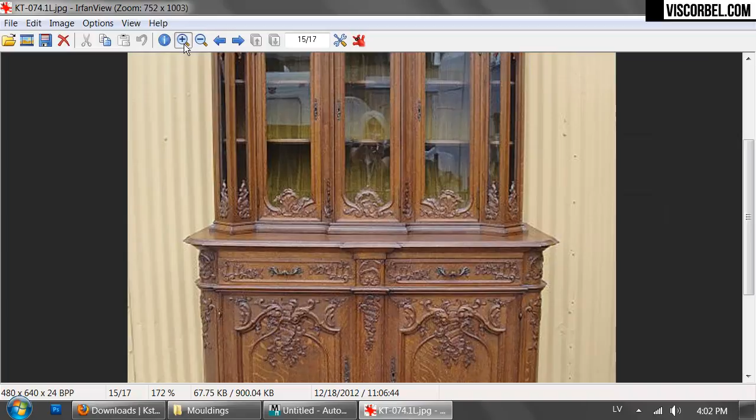So sometimes the molding profiles have some detail carvings on them, like this egg and dart profile here. But before we get to these ornament carvings, we have to figure out how to make the moldings themselves. Okay, some tabletops, baseboards, etc. So the basic idea is very simple, and the molding is made by extruding a profile along a path.

3ds Max offers multiple tools to do this, and my two preferred tools are the Bevel Profile Modifier. It's quite easy to use and it has a very direct approach. You can control everything about your profile directly by manipulating the profile subobject. And you have the Sweep Modifier, which is a bit more customizable, but the workflow is slightly different. So first I'm going to show you the Bevel Profile Modifier and how I work with it.

So let's say we have this path and we want to create a profile that we want to extrude along it. Let's say it goes like this. So let's say it's some sort of a tabletop or something like that, with a very elaborate profile. Okay, so you pick your path and add the Bevel Profile Modifier. Now just click the Pick Profile button and click on your profile.

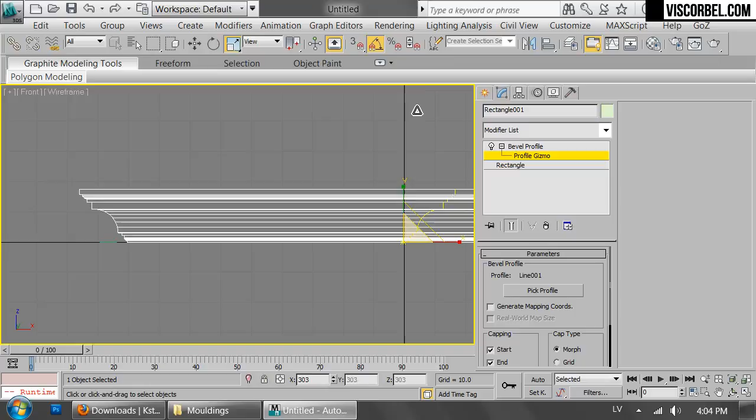Okay, so looks like our profile is pointing the wrong way, and with Bevel Profile it's a very easy fix. You press 1 to activate the profile gizmo, and you can manipulate it directly. So for example, I want to rotate it to 180 degrees. If I want, I can scale it up, scale it down, and basically do whatever I want. I can offset the profile as well by moving it inwards or outwards. So it's a very easy and a very direct way to interact with your final object.

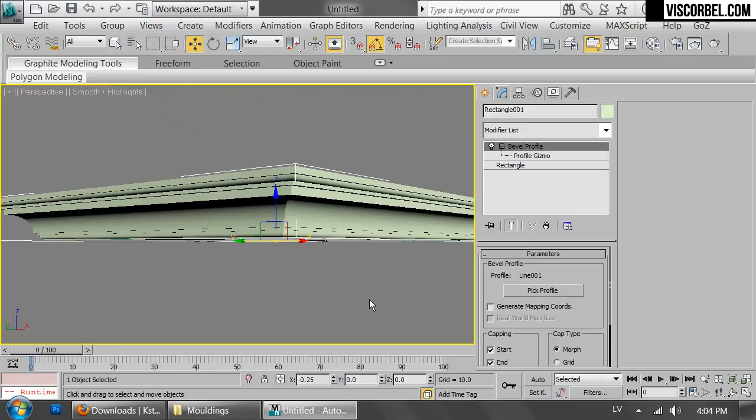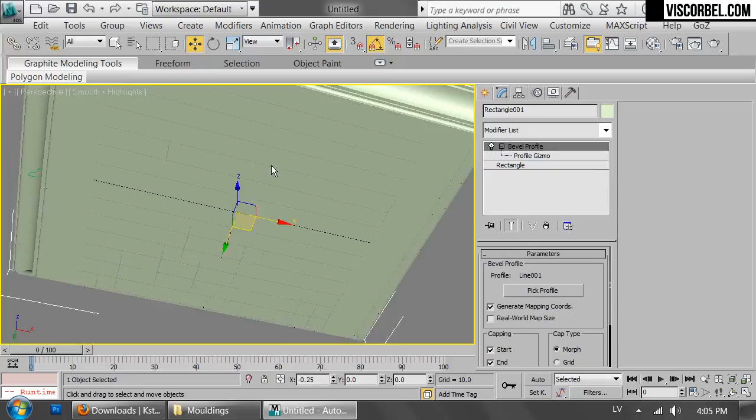And basically that's it for Bevel Profile. You have these options for capping here, which allow you to cap the gaps, and they are sometimes quite useful. Okay, and you probably want to generate the mapping coordinates as well when using this modifier. This way you can just assign some materials and render it.

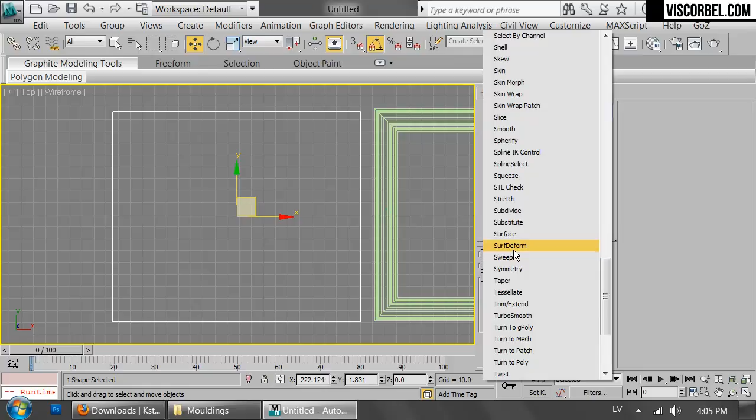Okay, so the next modifier I want to show you is the Sweep Modifier. It works in a very similar way. You go to Modifiers, select Sweep, and change from the built-in section to custom section. Click Pick and pick the profile. Okay, and as you can see, there is no profile gizmo for this modifier. You have to do all the adjustments with these settings here.

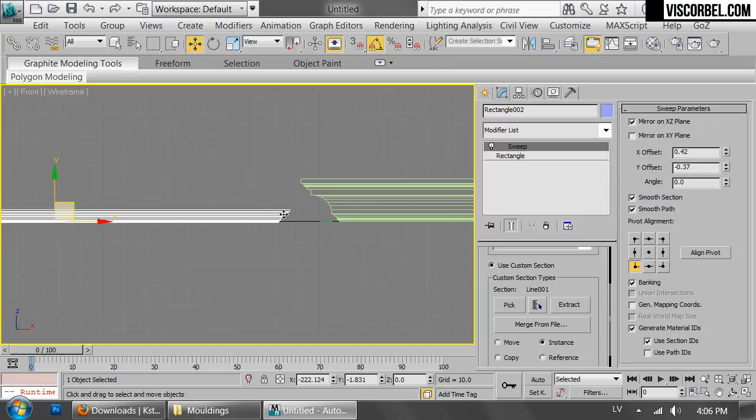You can mirror the profile on two planes. You can offset it as well. And you can rotate it here. So basically you can do almost everything you could do with the Bevel Profile Modifier except for scaling. And you also have some additional options, like you can select the pivot alignment or the point on which the profile starts. So this can be sometimes useful.

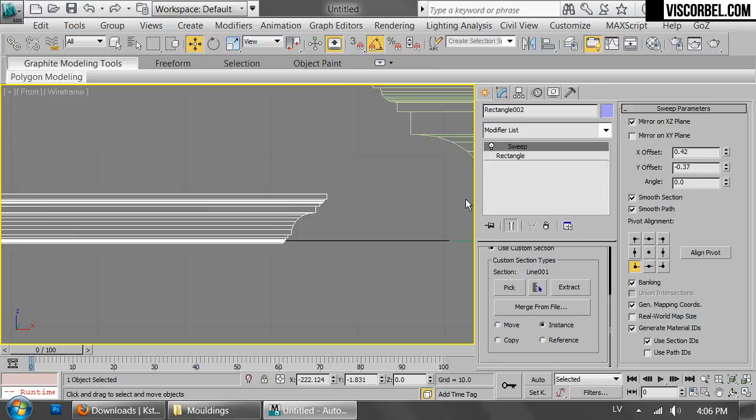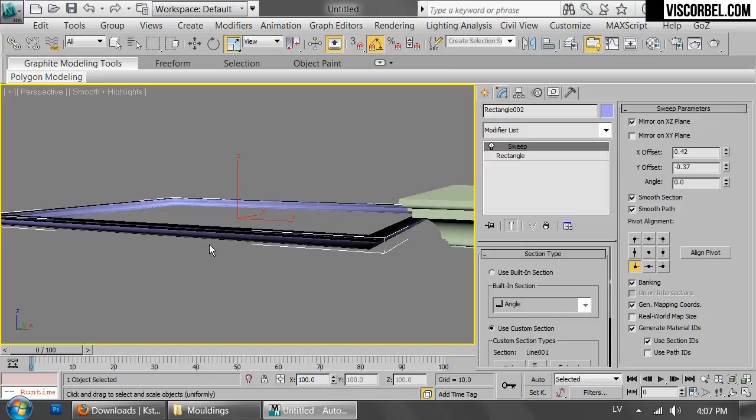Okay, and to scale the profile, the only way you can do that is by selecting the original line and scaling it up. Not the line itself, but the spline subobject of it. So you can't really scale it directly by modifying the modifier. So sometimes that's a bad thing. Okay. And if you get the profile that's inverted, like this one here, you can add a Normal modifier. And to close the gaps, you have to add another modifier, the Cap Holes modifier.

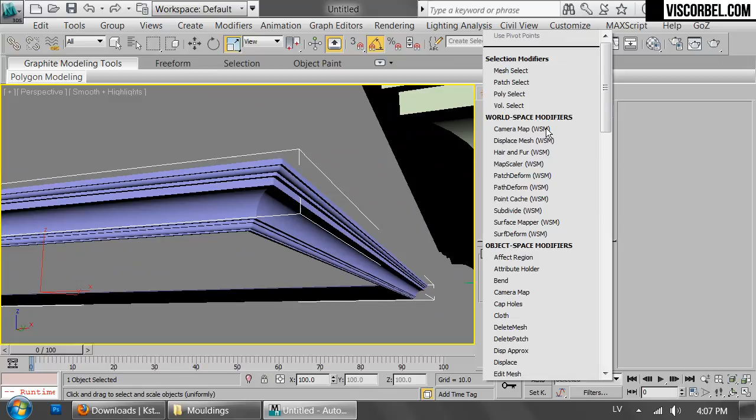So sometimes it's a bit more work, but sometimes the pivot alignment and other settings are easier to use than messing with this profile gizmo for the Bevel Profile Modifier. So the choice is up to you, really, whichever you find more comfortable.

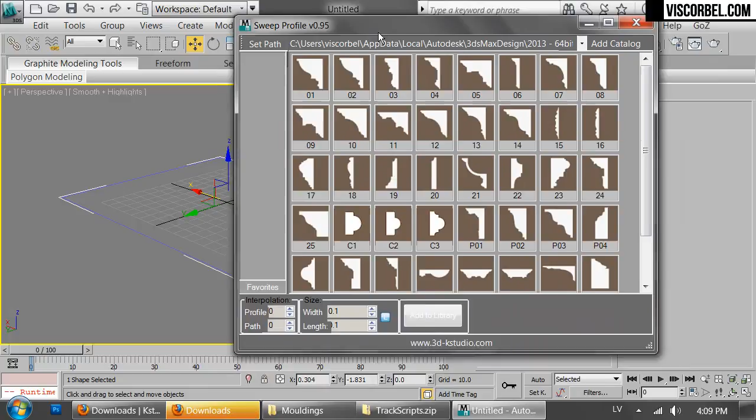So the way it works is you select your path, press the shortcut, and it brings up this window for the Sweep Profile script. And it's very simple to use. You just pick the profile that you're interested in. For example, let's try something like this one. And it automatically generates the geometry by using the Sweep modifier.

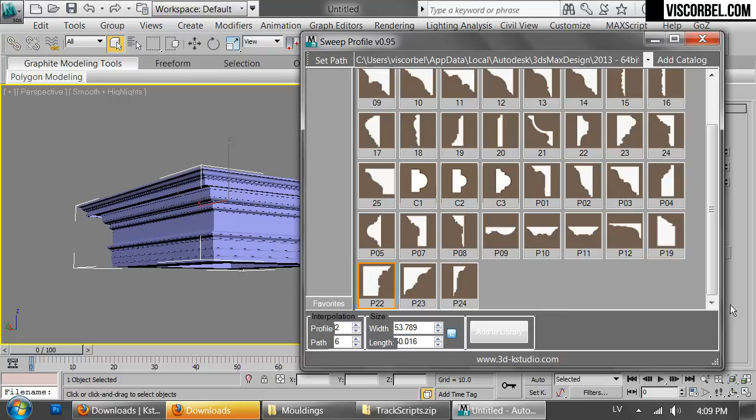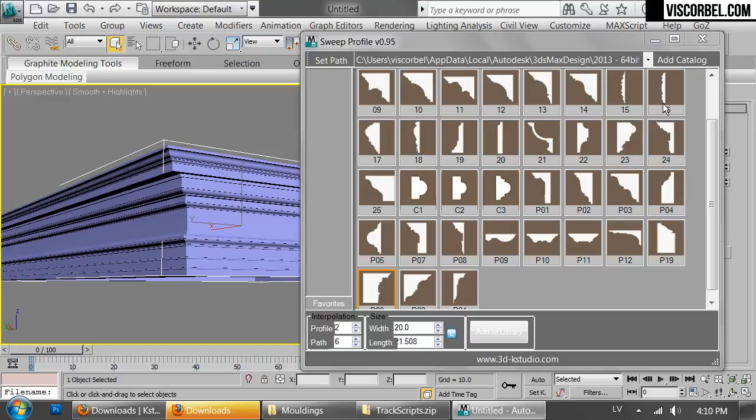Right, and you can actually scale it directly from this Sweep Profile script interface. You can enter precise values as well. You can control the interpolation of the profile and the path. So it's a quite useful thing to have. And you're not really limited to these default profiles. You can actually create your own. For example, I'm gonna make something like, let's say, something like this. Just some random profile.

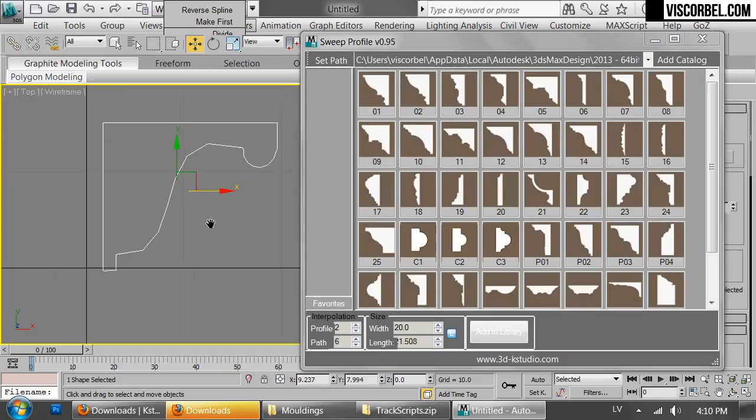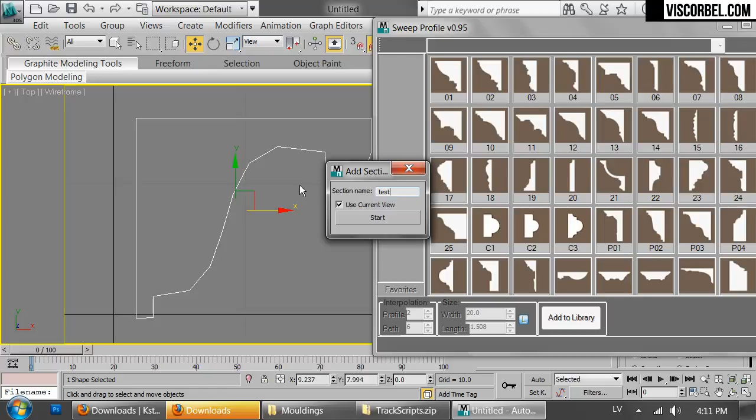Okay, and once you have this profile ready, you can frame it in your viewport. This will be used to generate the screenshot. And press the Add to Library button. Okay, enter some name for this profile and press the Start button. As you can see, it was added to the list of profiles, and you can use it whenever you wish.

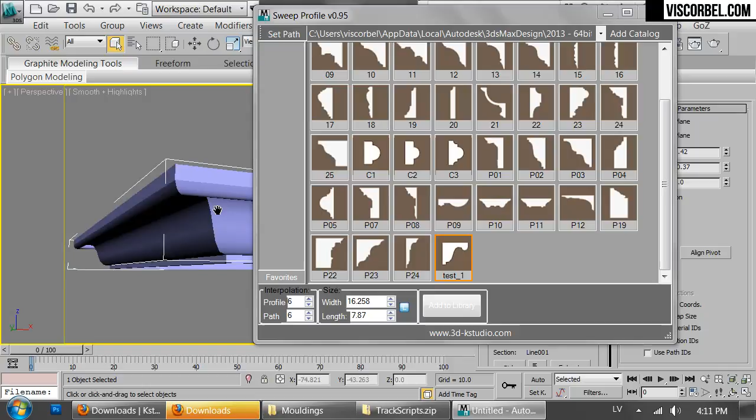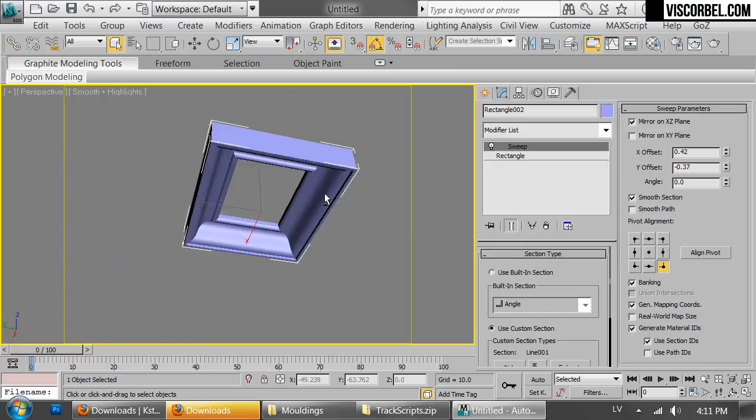For example, I'm going to change this profile to my test 1, and here it is. And you could use the interpolation settings to make it smoother, you can scale it and whatever. So that's a nice script and quite useful for classic furniture. Okay. So these are the basic ways to create some moldings.